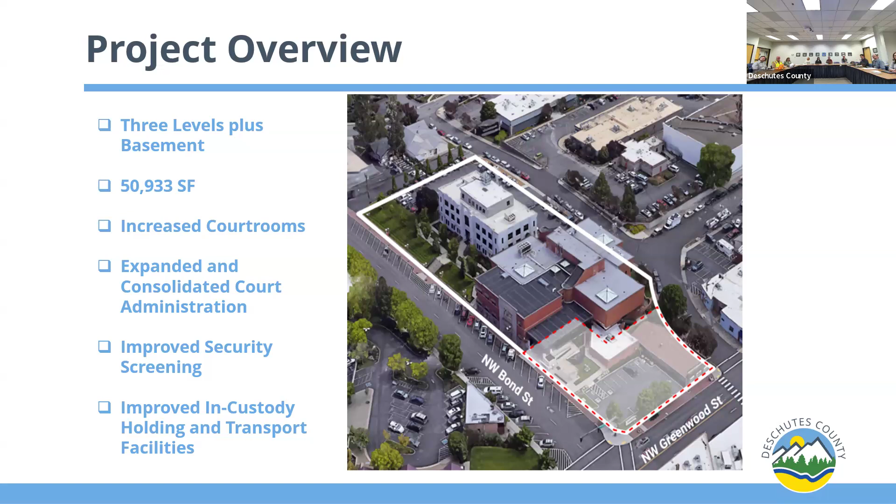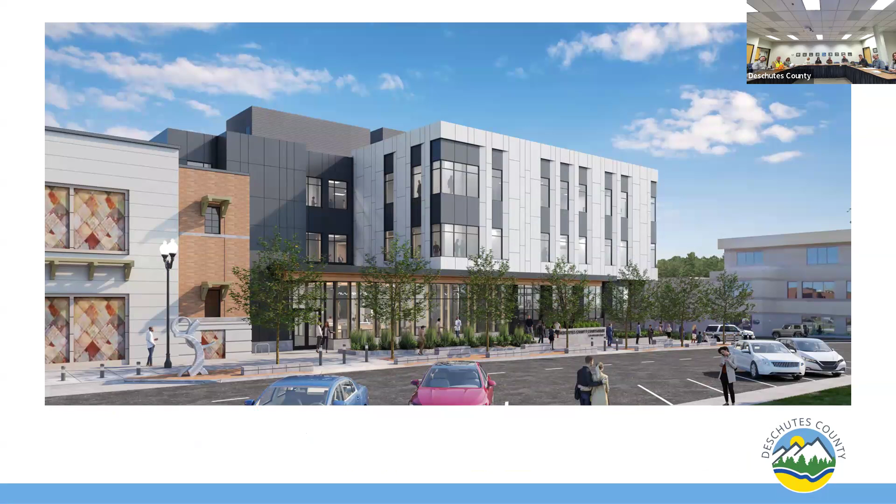So for an update, we'll look at some ongoing upcoming work, touch on the schedule, where we're at overall, and then just talk about the budget.

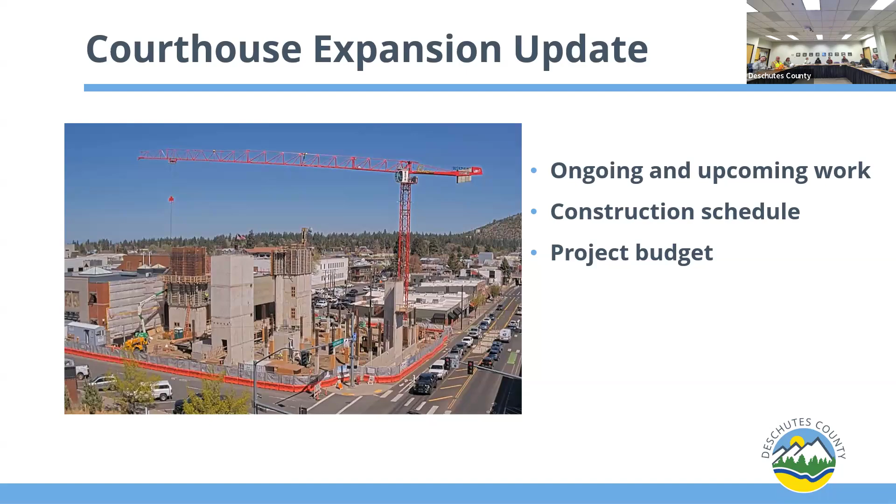Here's a view standing on Harriman Street, looking west, of what will eventually be the staff parking garage entrance off Harriman. You can see they've poured all of the columns; I think they got the last column poured last week. And then you can see the elevator and stair cores popping up from there.

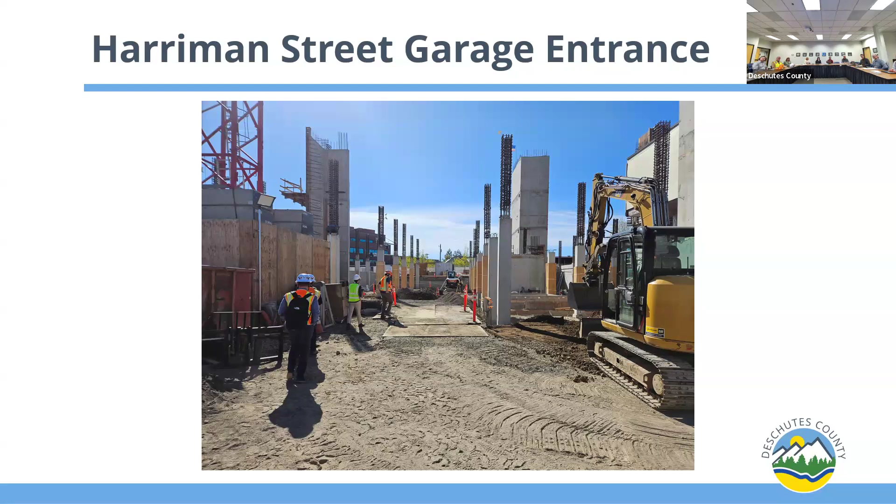Bond Street, this is a view of what will be the sidewalk on Bond Street, looking at the corner of the southwest corner, Bond and Greenwood. That's kind of the column layout in the parking garage there, and then stair 1 would be the west exit stairs in the foreground.

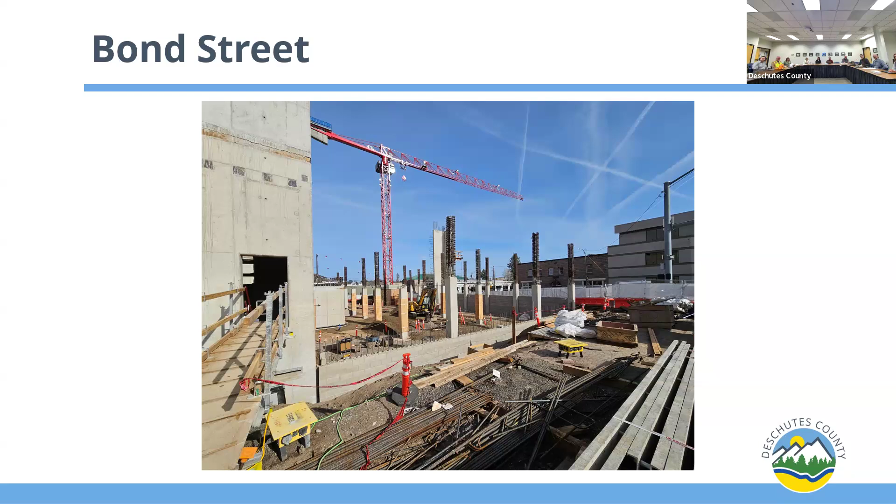So elevator 1, the core for that is almost topped out, if not topped out. That's in the background there. If you're looking at this photo, this will be the street level entrance off of Bond, and elevator 1 will be the elevator you'll see in the lobby when you walk in. The lobby will be a single story height space, whereas the rest of the expansion will be 3 stories.

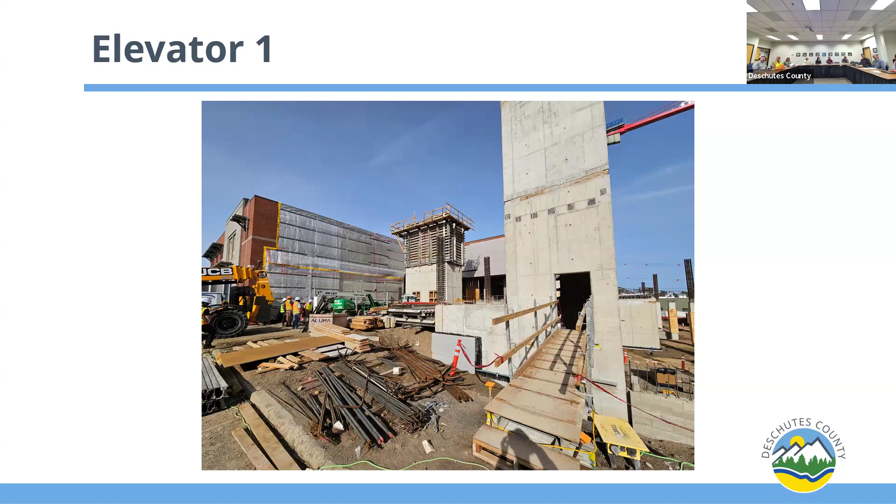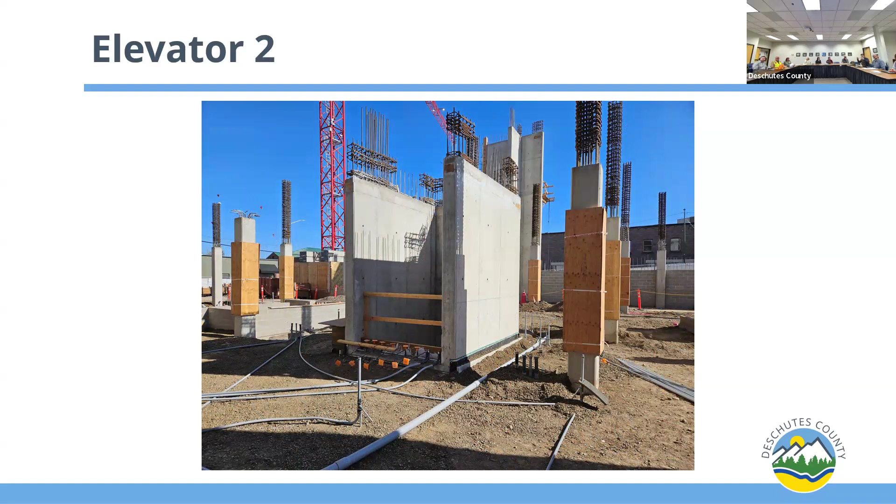Elevator 2, this will be used by the sheriff's office to move up and down the building. This is in the basement. And then this elevator will pop up between the 2 new courtrooms for easier transport.

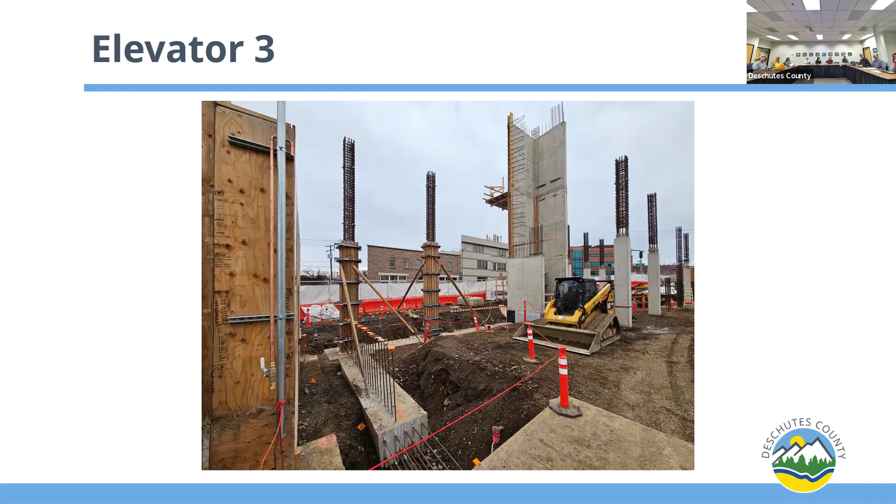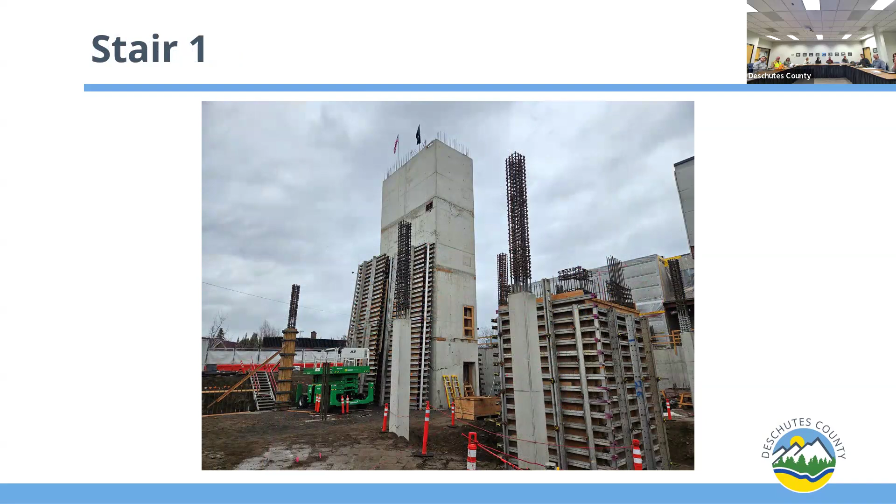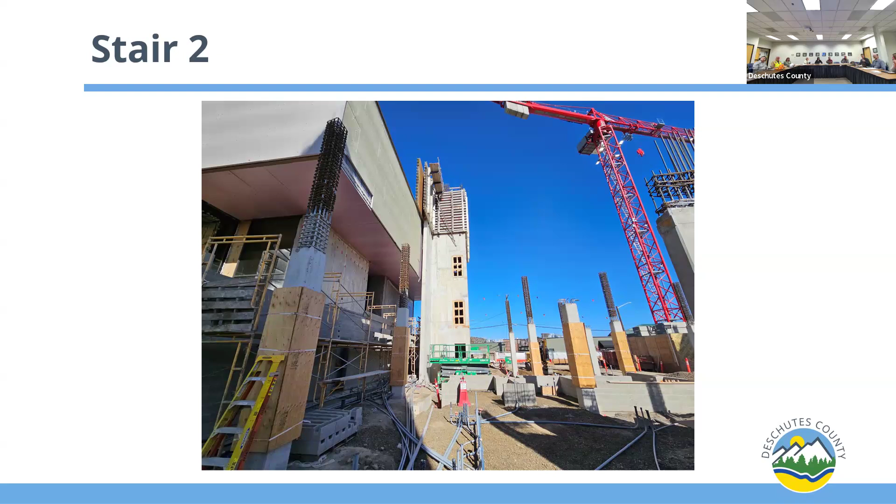Stair 2. This one's right up against the existing building, so Pence has worked through the logistics of what's called the blindside pour, where you have to slip the formwork in between. There's an 8-inch expansion joint, pour the concrete, and then slide the form out. This is just an exit stair on the east side of the building.

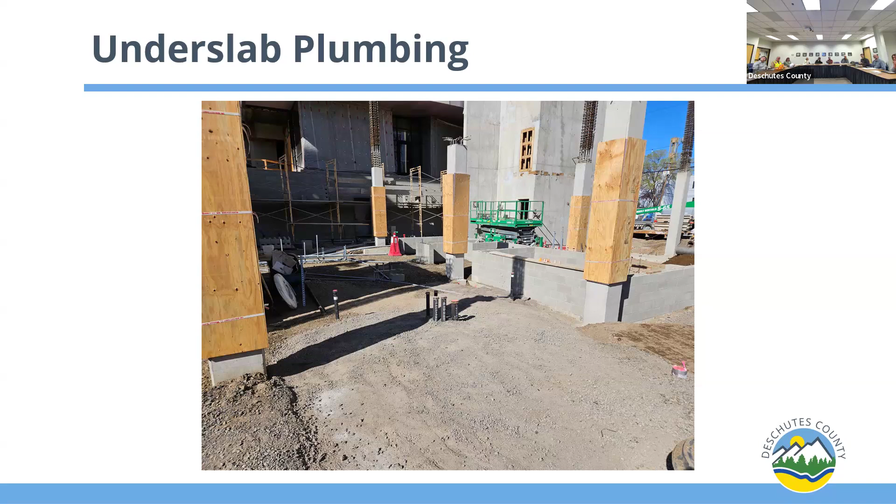And then they've been working on under slab plumbing, largely complete, but you can see the stubs, the waste lines and vent lines stubbed up, which will come up right between 2 of the holding areas in the basement.

And then lots of conduit routing all around under the slab. It's largely coming from the new electrical room that's between stair 2 and the existing building. There's also some conduit for data connections throughout the building to the new IDF building. There's a new IDF room, which is a server room.

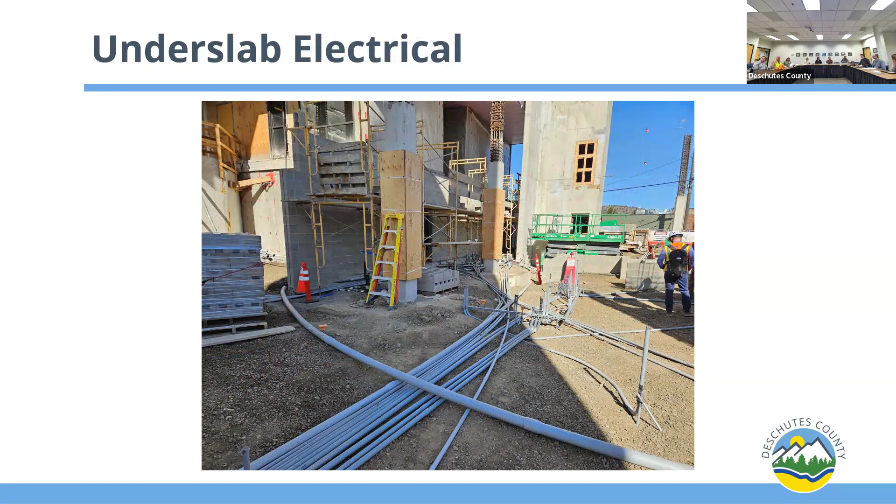So that's the gist of what's being built. I wanted to show you some photos, renderings of the mock-up that we're building, and we'll stop by there on the way to the courthouse.

So this is a view of basically the mock-up. The purpose of the mock-up is to get one example of each part of the exterior facade, so that the contractors and trades can work through the sequencing of how you install windows at brick masonry, windows at concrete siding. And on the left side, there's a lower portion where we'll build an expansion joint at the wall and the roof, so they can work through how it all comes together here in the mock-up before they try it on the larger building.

It's also a chance for the envelope consultant to come and make sure that we're building it per plan, per spec, so that we can make sure we get the warranties. What you'll see today is it's just framed up and sheathed, and then the weather barrier's been installed, and the openings in the window have a fluid applied membrane. That's kind of where we're at now. We worked through the sequencing and methods of putting up the weather barrier, and the types of sealants and fluid applied products to use.

Let's see, ongoing and upcoming. So elevator 1 pours are still ongoing. Last time I was there was formwork at the top level, so that should be completed mid-April, end of April. Stair 2, pour 2 and pour 3 is completed mid-April.

Underground plumbing and electrical is wrapping up at the end of this month in April. Once that's done, they'll move into slab prep for the basement level at the end of the month, and then pour the slab, starting early May. After that, the level 1 concrete deck will get poured sometime mid-May. Is the level 1 concrete deck the floor, or is that the first floor?

The basement slab will be poured early May, and that's just a slab on grade. Level 1 will be an elevated post-tension concrete deck. There are several different types of slabs in place. The main expansion structure will be post-tension, but where it ties into the existing building, there are some poured-in-place slabs.

So that's kind of the next 4 to 6 weeks, what we're looking at with the schedule, just kind of breaking it into big chunks.

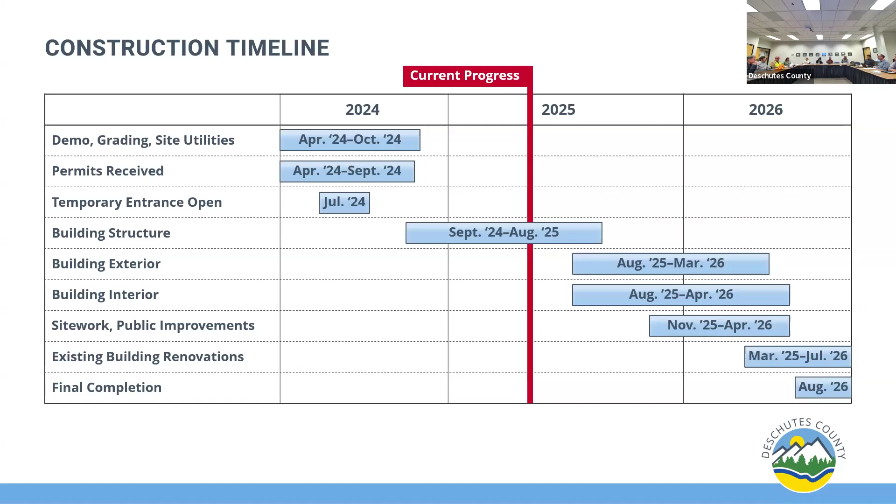Question about the property - are you using the actual products that will be used? Sometimes that doesn't happen. Yep. And the building envelope, was that under the A&E team, or was that independent? It was under the architect's team.

It's not separate - it's someone who works for LRM, who's the specialist. I think he's coming from Portland. He's going to come down and do a site meeting on the 29th or 30th. It's next week.

The importance of using the exact approved products is so critical that we've actually caught a couple things where it didn't look like the exact finish, so we called them out. Got it, thank you. Are there any unique products - FEBR type windows, fire doors?

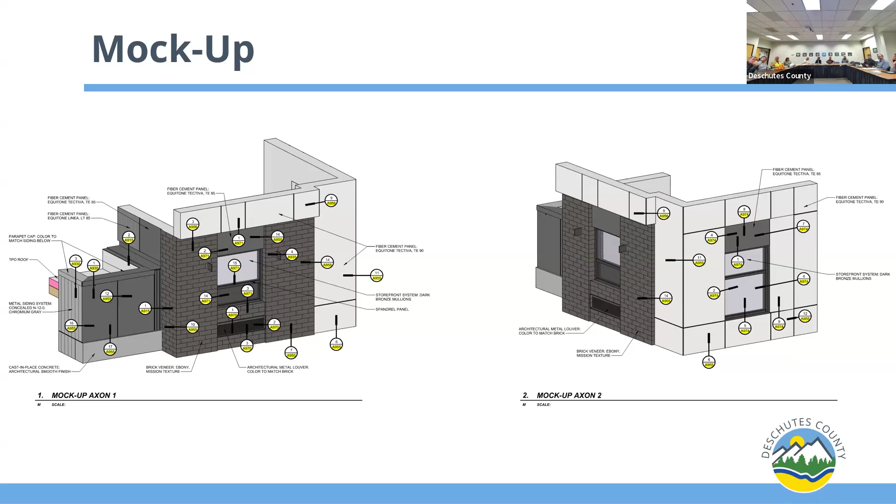Any other questions so far, and then we will touch base on the budget.

I just want to point out that when we last met, we were discussing a budget increase. That was subsequently approved by the board, so this budget reflects that increase and has been incorporated. Total budget was increased by 2.9 million back in January, which now includes all the change orders for the Pence contractor, for LRS, and for Cumming Group. So total current budget for the original base scope is 46,800,000. Adding to that for AJ Tucker and also for the FF&E funds transferred over from OJD was 500,000, so total budget we're working with is 47,472,426. Of that, as of the end of last week, spent to date is 17,640.

17,643 and 32 dollars, which equates to about 37%, which is right in line with our monthly invoices that we review and approve. I think you guys are about 35%, so like that.

Couple things to touch on: Pence's contingency compared to their balance to finish is still about 6%, which is great. Owner contingency compared to the balance to finish is just under 5%, which is also very good. We've actually been doing really well on contingency tracking since the start of the year.